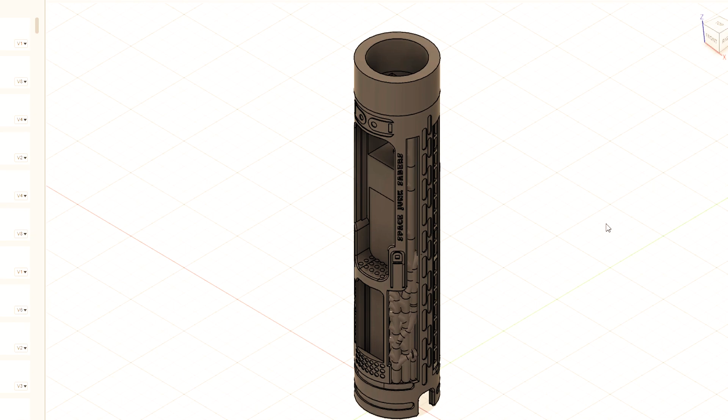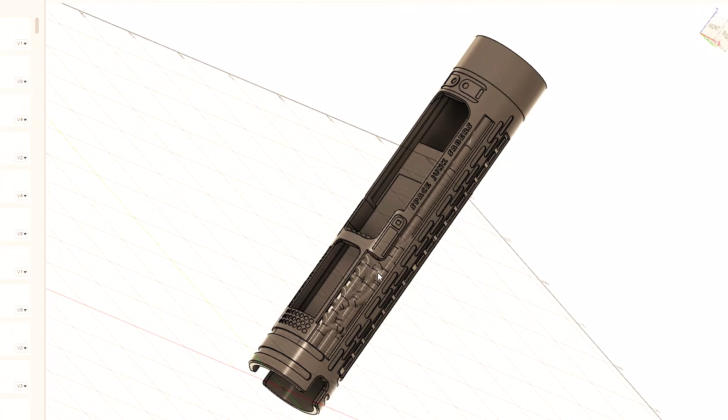Let's come into Fusion. This is the chassis that I did for this build. Pretty straightforward, right? We've got a static chassis. Proffie board sits here, it does slide up underneath this lip. There's plenty of room to get at the USB and SD card if need be. This section here is for an on-board OLED, so an OLED screen slides in here and it just kind of lives in there. Around back, here is obviously our battery tray. This is a 28mm speaker from Smuggler's Outpost.

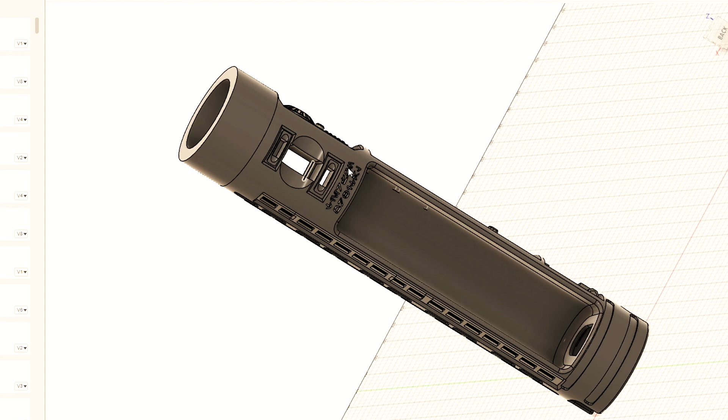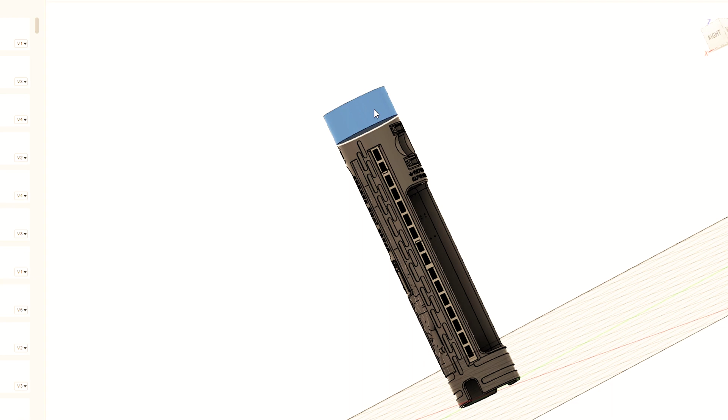Of course, I've got an incredible amount of unnecessary greeblies on each side. Around back, where the kill switch is, I have two LEDs, a green and a red square LED that I embedded into the chassis. Both of those are their own blade in the config, and they blink. I've actually set them up to blink, reminiscent of the red and green arrows on Luke's hilt. Okay, and that's it, nice and easy. Again, it's a static chassis, so it's secured in place with a set screw. This upper section here is where that marries into the top part of the hilt, and that's it, nice and easy.

So let's come up top and talk about this hilt, right? So here it is. At this point, I'm no stranger to hilts from Space Junk Sabers. Of the two that were sent to me for install, this one is my favorite. I really love the look of this Scrapflex. I love the feel of it. I feel like it's a perfect size. Just a really rad looking hilt.

I am not going to try to source these parts. I mean, some of this stuff is familiar. Obviously we've got a Graflex top. There's a Graflex switch assembly, mount assembly here that's been heat stained. I'm not sure where this grip came from. We've got some steel plating here that's also been heat stained. D-ring. Really nice build, right?

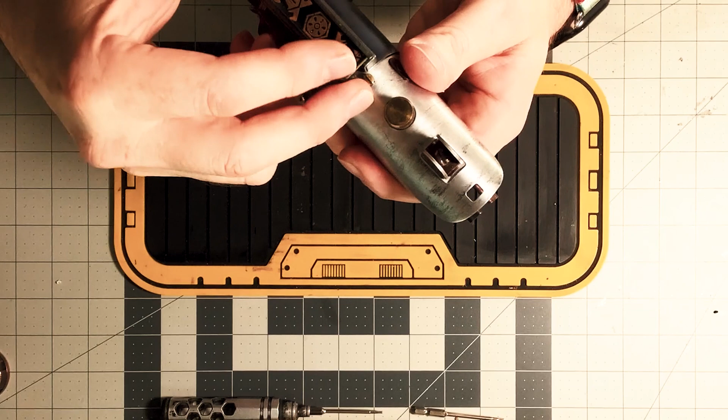So let's talk about how to use this guy. To get at your chassis, you want to unscrew the grip. Here is that chassis. So I did a pass of rub and buff on this and then went back with some red paint just to bring out the detail in some of the greeblies here. And that's pretty much it, nice and easy. The way that this chassis secures to the upper part of the hilt is with a set screw, and that set screw is underneath this clamp card. So if you want to tighten your chassis, if you're finding that it's become a little bit loose, if I could get the right size, you can tighten that set screw.

And that's it. So there was a set screw around back here as well, but this was a little too high for the chassis itself. I needed room for the switches and everything, so I added another one underneath that clamp card.

Okay, we've got two momentary switches in copper. These are from Phil at Kalymian Customs. Some really nice greebly work up top. There is a knurled thumb screw here, which does serve as your blade retention. Really love that.

So let's talk about how to use this guy. Spring side, as we always say, is your negative. Take the flat part of your battery, negative side towards the speaker on this particular build. Rest your battery in the tray, hit your kill switch.

So there's that red and green blinking LED by the kill switch. Here is our Proffie. Here's our OLED, okay?

So I've gone ahead and put different animations for each font. Each one's got something a little different, just to keep it different, right?